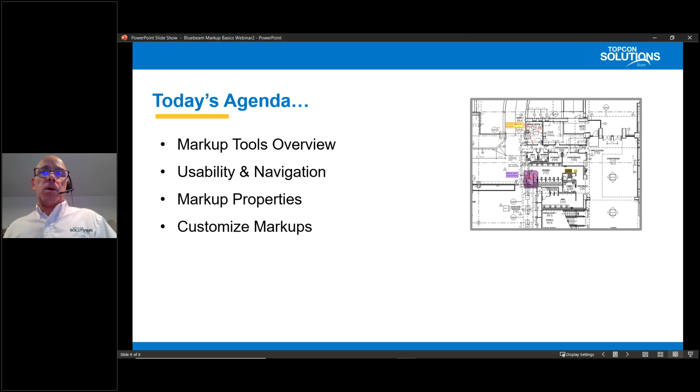So let's get to it. Today's agenda, folks: we'll start with an overview of the markup tools. Then we'll go into using the markups. We'll work with markup properties. We'll customize markups and tool sets. And we'll go over the essentials of the markups list.

Okay folks, so now let's get into the markup tools, an overview of the markup tools. Currently we're looking at Bluebeam Revu 20, which is similar to Bluebeam 19, and they decided to change it to just 20, which I think is a great idea. Markups are basically comments and annotations that appear on your PDF document. They are fully customizable, they can be saved, reused, imported, exported. They're essentially part of the PDF, but not part of the underlying content of the PDF. Because of this, they can be moved and edited real easily and more readily than the PDF content itself. Markups can actually become part of the PDF by flattening, and then they can also be associated with different layers.

So let's just take a look at where the markup tools are actually located. Up in my tools menu, top of my screen, this drop-down will show all of my markups. These are all my markup tools. I've got the little tool here, text box with letter T next to it. T is going to be your shortcut key, as well as W, N, and Q. So here we've got text box, typewriter, note, callout. We've got pen and highlight. The eraser tool only works with the pen and highlight right in here.

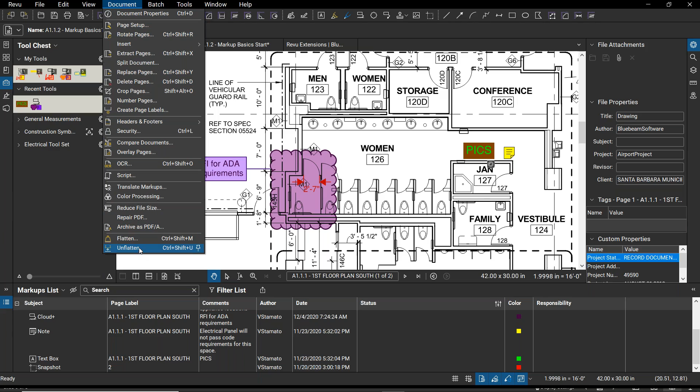So before I do that, I'm going to come up here to Document, then down here to Flatten - Flatten and Unflatten right next to it. If I click on Flatten, I get this drop-down box with options. One of the most important ones is 'allow markup recovery.' If I have that checked on, when I flatten these markups to my document, I can unflatten them if I want to access them, edit them, remove them, or copy them. So as long as I have this checked, I'm good to go, or I could recover the document.

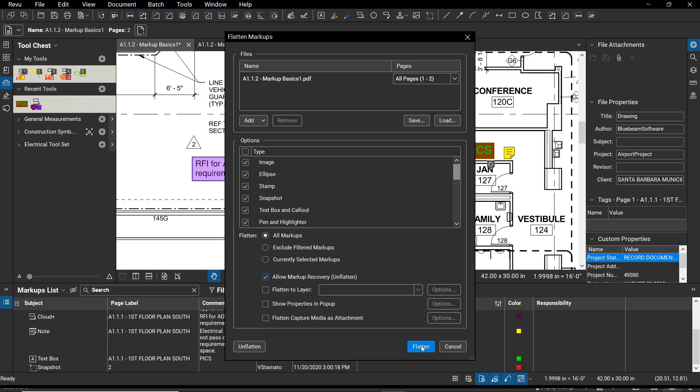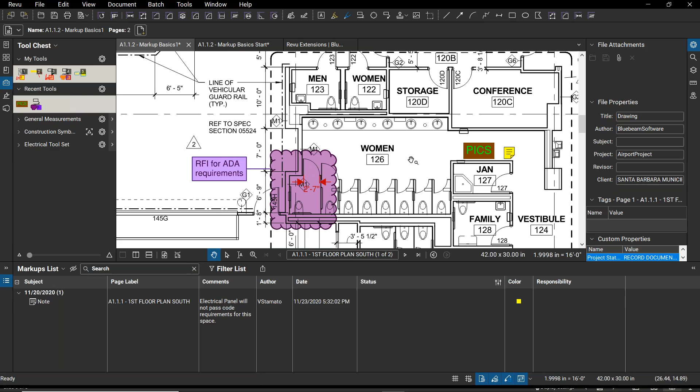So now I'm going to go ahead and just click Flatten, and you can see all of those markups are no longer in the markups list. The one that was unable to be flattened is this note tool, over here - we'll talk about that in a moment. But now you can see I can try and select these, and they're part of the PDF content, but they kept their image and their color.

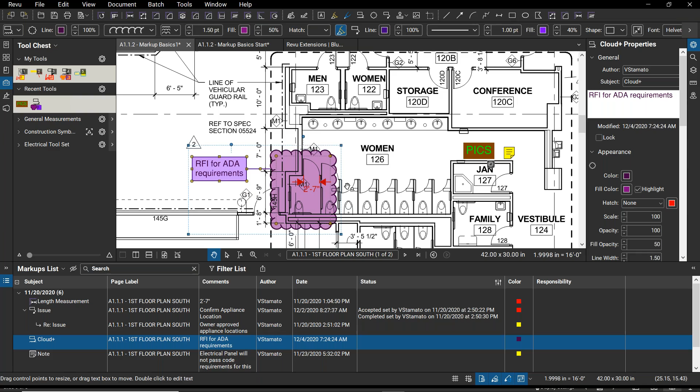So now if I want to unflatten, I would go back to my document, click down here on Unflatten, and you can see the markups list is now populated with the markups. I could go back to my markups, click on them, edit them, move them around, and have access to them.

So that's kind of a way to almost protect your markups as well. If you flatten your markups to your document, another user can't accidentally select them and change them or delete them, that kind of thing. Another thing I want to show you is you could lock your markup.

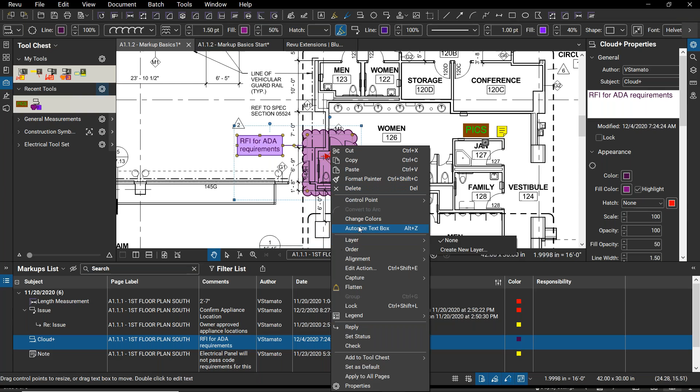So if I select this markup with a left click and then right click, I'm going to come down here to lock. Now the little controls have turned gray, and this markup is locked. I can click on it and it'll highlight, it's still in the markups list, but it's not accessible. I'll right click on it again and unlock.

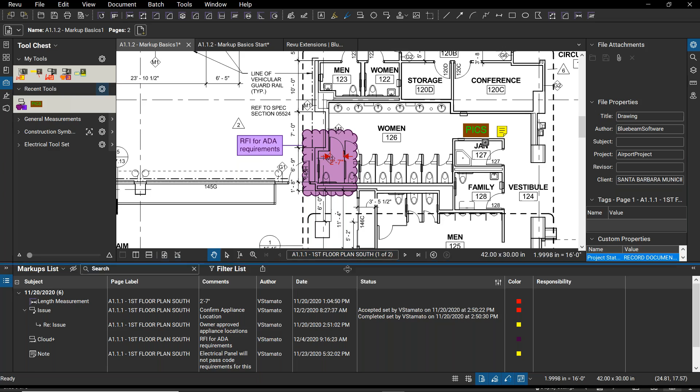All right, so just a couple of things about the markup tools there. Now let's look at where markup tools are actually located. There's a few places where you can find markup tools. One place is on an existing drawing. I've got markup tools on this particular drawing here.

There's also the shortcut key. So if I type in the letter K, that's the Cloud Plus markup. I can go ahead and start my cloud. Okay, so that's one way to do it.

I can copy markups from one document to another. You can come up into Tools, Markup, and select markups through here. And I could also come to my tool chest, which is this little toolbox looking icon over on the left side of my screen.

If you don't see it on your screen, on the left side over here, if I hover my cursor and right click and go to show, this is going to show me all of the potential panels that are available. This is called the panel access area. These are all the panels that are available. So if I didn't have it turned on, I'd come down to tool chest and select it right here and turn it on.

If I wanted to remove tool chest, I can right click on it and hit hide, and then it goes back into the panel access, and it just cleans up this area instead of having a whole bunch of icons there. So the tool chest is another place to get markups.

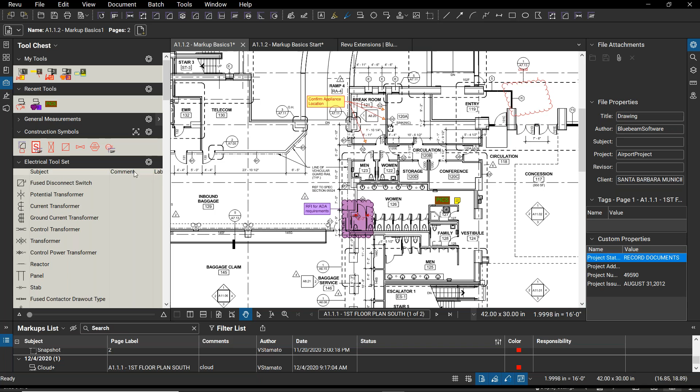So here are more markups. I went ahead and downloaded this electrical tool set from Bluebeam Revu Extensions. And the nice thing about it is I didn't have to make any of these tools, I just downloaded them. I'll show you where you can get tools from Bluebeam Revu Extensions. In this particular tool set, you can see I've got a symbol for the tool, or the symbol for the markup, and then a little subject information about the markup itself.

Inside the tool chest itself, I've got these little cogwheels. If I click on one of these cogwheels, I can change how my tool set is displayed, either by detail mode or symbol mode. If I go to symbol mode, I can hover over the tool and still get a little tooltip. Basically it's just a single click on that tool to bring it into the drawing and place it on the drawing. So that's symbol mode and detail mode right in here.

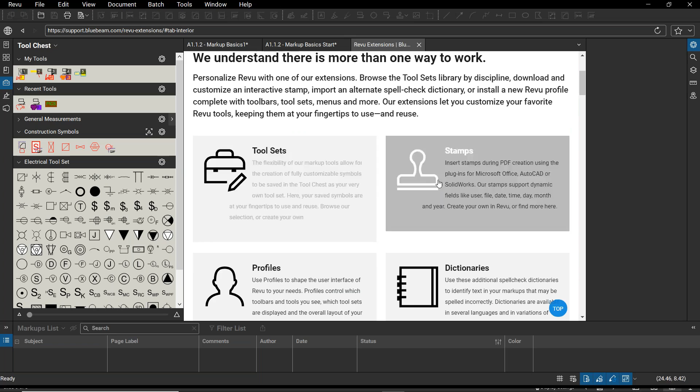Another thing I want to take a look at, folks, is — well, I mentioned the Revu extensions. So Bluebeam Revu has this web tab. It's under the Window menu, Web Tab. I went ahead and opened up this web tab, and then it takes you right into Bluebeam's help. And then I just did a search for Revu extensions. This is a location in Bluebeam where you can download tool sets such as this electrical tool set, stamps, dictionaries, different profiles, and basically you'll see them like this.

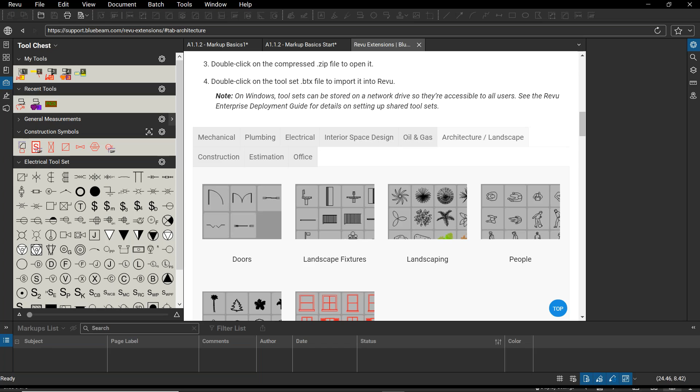It's just a matter of clicking on whatever tool set you like and downloading it, and it basically opens up. What I do with my tool sets is I save them in a separate folder marked tool sets outside of Bluebeam so that I always have access to them.

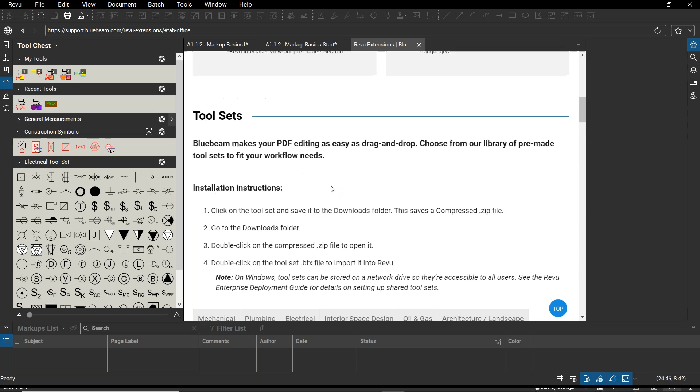Here's some tools for Office. Same with stamps, different kinds of stamps, interactive stamps, profiles, different profiles that you can download, and dictionaries as well. So that's the Revu extensions. I find this really helpful — these tools are already created for us.

All right, so those are locations where you could find markup tools themselves. Let's take a look at markup properties. So markup properties — if you look across the top of my screen, there's nothing here just yet. And if I select a markup, now it's populated.

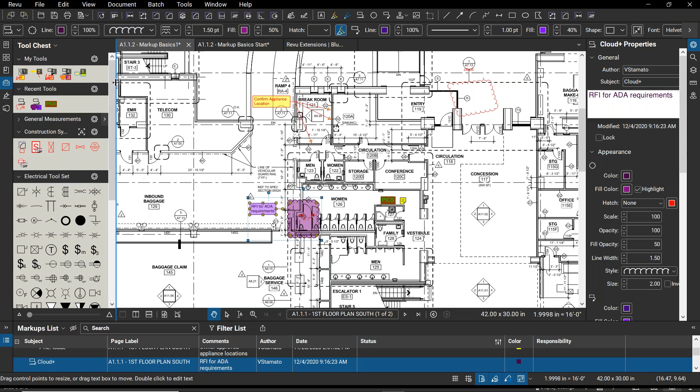So I'm going to hide some of this stuff on the side because it can be distracting. Now I've got these properties — these are the properties of this markup. You can see I've got over here properties of the line, so I've got different colors right here. I could change the colors of my line, change the width factor of the line, change the opacity of the line. Over here, I could change the shape or the size of the actual cloud.

I've got fill colors. I gave this a purplish fill color, and then I could change the opacity of that fill color by going into this next box to make it lighter. And there's also the highlight option right here.

By clicking on that, the markup becomes a highlight, so you can see the color of the markup and still see the content underneath it. And over here, I've got options for my line color, which we're going to use shortly. I just wanted to show you what's available to us.

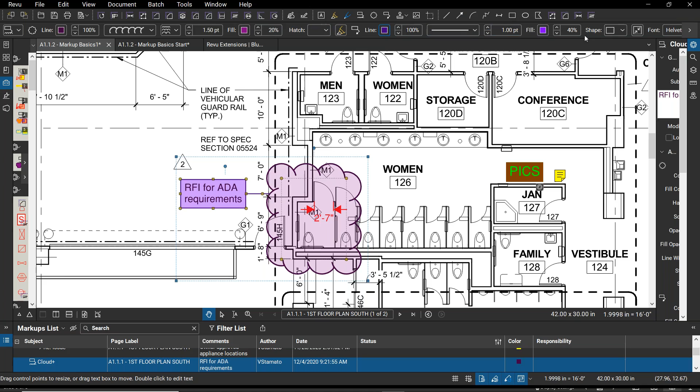Okay, so this is the properties toolbar. It's going to populate as soon as you select a markup, and you can see it disappears when nothing is selected.

And there's another place - as always, software has more than one place for things, keeping us busy. If I select the markup and turn on my properties cogwheel, I'm now looking at the properties of this Cloud Plus tool. There are a lot of options, and some you really want to get a grip on will be the subject of this Cloud Plus.

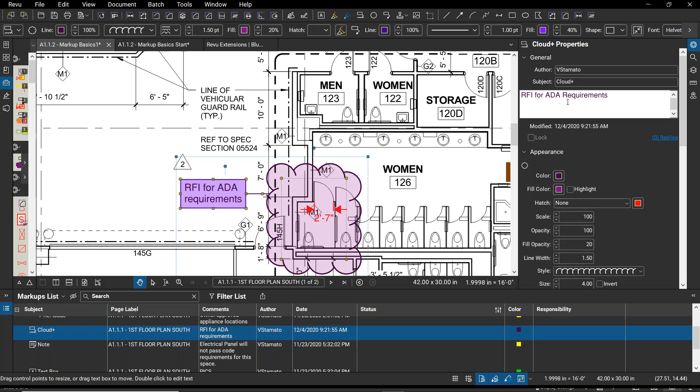Right in here, you can see the text from the text box. I can edit the text right here if I wanted to, or I can double click in the text box and edit the text there.

So there's that. Also down here in the properties cogwheel, I've got options - I could add hatch, opacity, change the opacity, and once again my line style if I have any line style I like.

Colors, and the shape right here - this rectangle - I could change the text box to a circle, triangle, and they've added a hexagon for 2020.

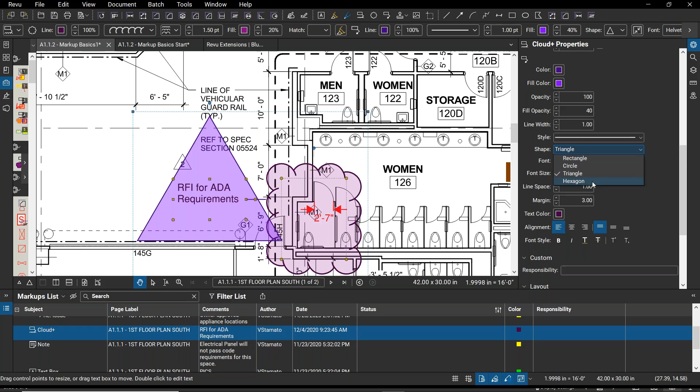Different text types - good idea to use a TrueType font text type that will always print easily. Font size and more font editing tools.

And then down here, I've got custom. Since I created a responsibility column, that custom column is right in here, and I could put whatever responsibility information in there.

And add tool chest - so if I click on this, I could add this to the My Tools tool chest. And those are some of the real basic properties.

Another property I want to show you here is, suppose I want my text box to be rather large, and I want my text to match the size of my text box. So I've got these two other options over here - this auto size text box tool and auto size text.

So if I click on auto size text, it's going to make the text larger to match the size of the text box. And if I click on the other one, auto size text box, it's going to make the text box smaller to match the size of the text.

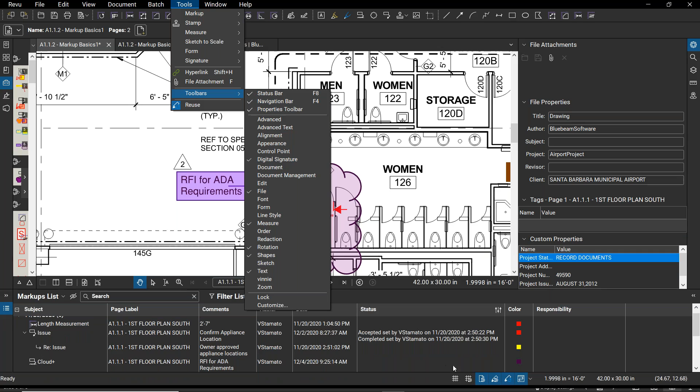And then down here, a couple of things I've got are snap to content, which is good for measuring, snap to markup, also good for measuring, and reuse markup tools. So just by having this reuse markup tools turned on, you could single click, put a markup on the document, hit enter again, and the markup comes right back up. That's your reuse option right there.

This is also available to be set up in your preferences, and your preferences are actually right here - Revu, preferences - and you've got lots of options in here. So if I go to tools, I think reuse is in here. Here it is, reuse tools. So under tools, markup, reuse tools, I've got that selected.

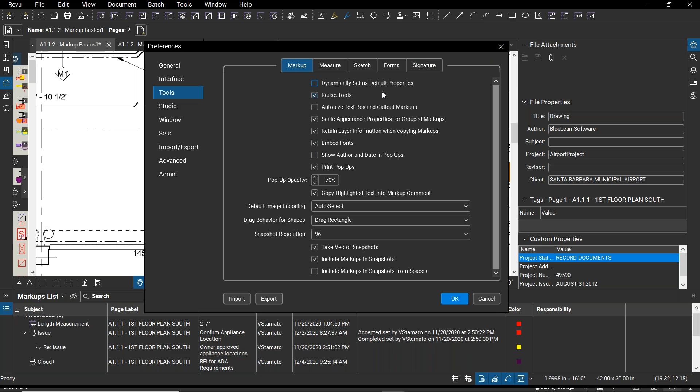We did a little webinar on preferences, and you may find that information on our website—I think it was part of the Bluebeam Jumpstart series, though I'm not sure if it's still available. Anyway, we covered preferences thoroughly. There's a lot, as you can see. All this information is also available on Bluebeam's website, so you can go there to get what you need about how preferences work and how to set them up.

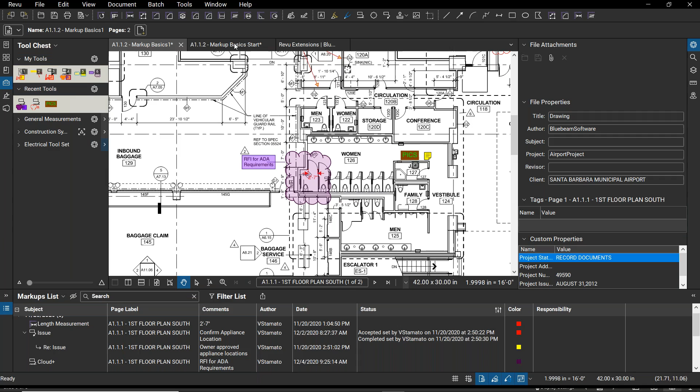Let's go ahead and customize some markups, and then we'll look at the tool chest a bit more. The two tool chests I'd like to focus on are My Tools and Recent Tools. Let's go to our sister drawing—basically the same drawing, but without the comments and markups.

The first thing we're going to do is copy a markup. I'll click on this one, copy it, go into my other drawing, and paste. There's my markup—it comes in with all the information that's in that markup. Simple copy and paste, copied into this new drawing. By doing that, that markup now shows up in My Tools.

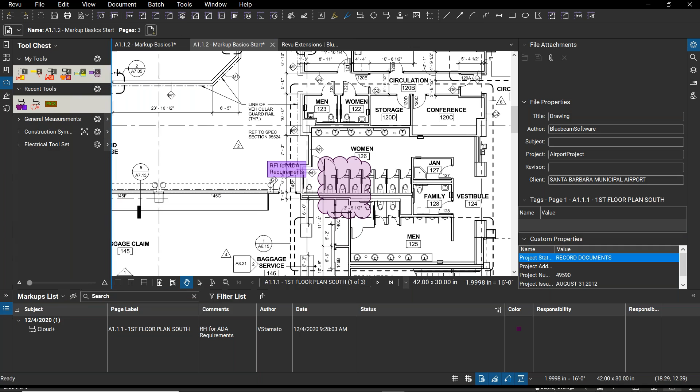Let me make this a little bigger. So here under My Tools, markups, this markup now shows up right over here. I can also access it right from here. By a single left click on the tool, I could bring it into the drawing in the shape that it's in.

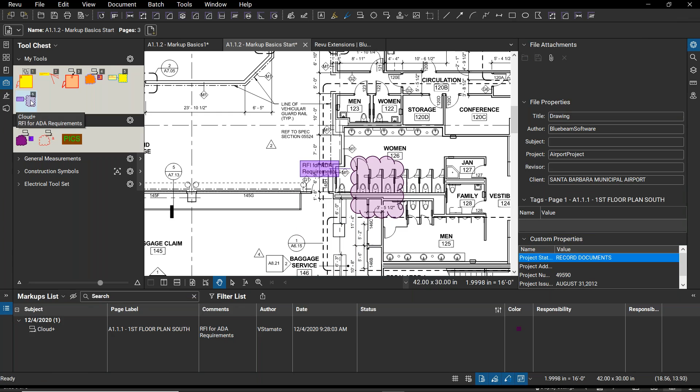So let's talk about that. What I've got here is two ways to access a markup from the tool chest. If I double click on the markup in the tool set, you can see it changes shape and changes its mode of operation. There are two modes: one is properties mode, and one is drawing mode. This is currently properties mode, and I know that because it's an icon showing the tool in a little sketch, whereas drawing mode shows just the tool without that symbol.

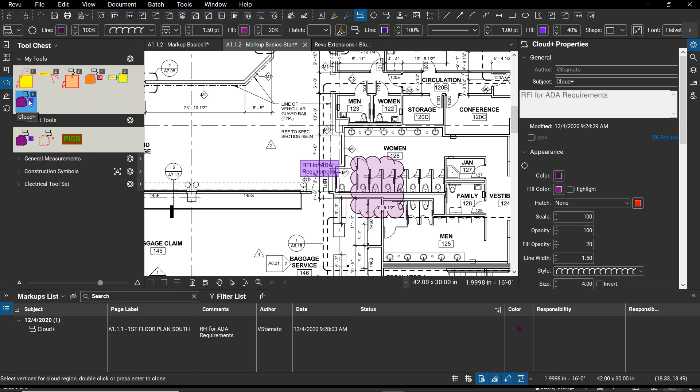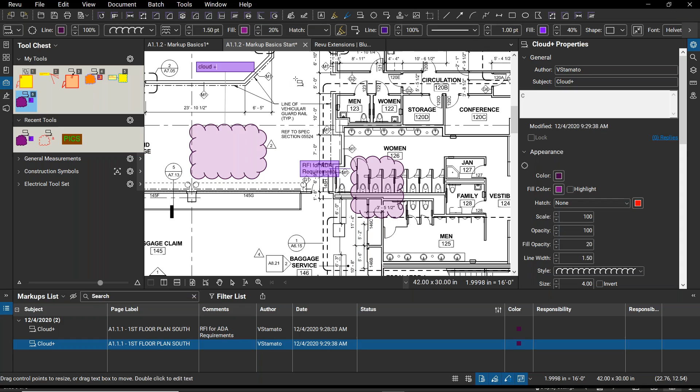Properties mode allows me to create that markup with the properties of the markup, but not the same shape. So I could go ahead here and make my cloud plus. Escape—now I've created this markup with the properties of that particular markup.

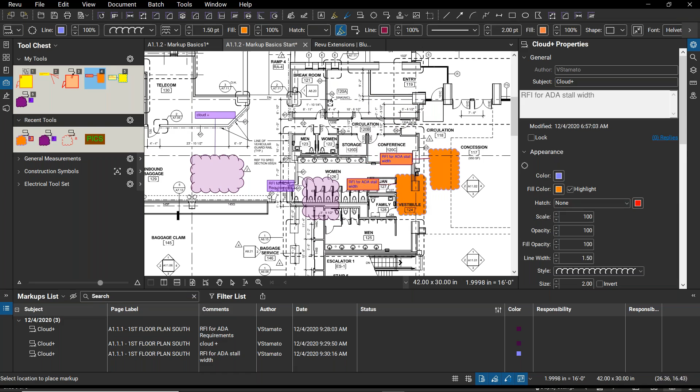Now suppose I've got a markup in here that I just want to reuse. I've already created this markup and I just want to bring it in at that same size. This particular one is an RFI with some information about a stall width, so I'm going to use that just like that and put this right here.

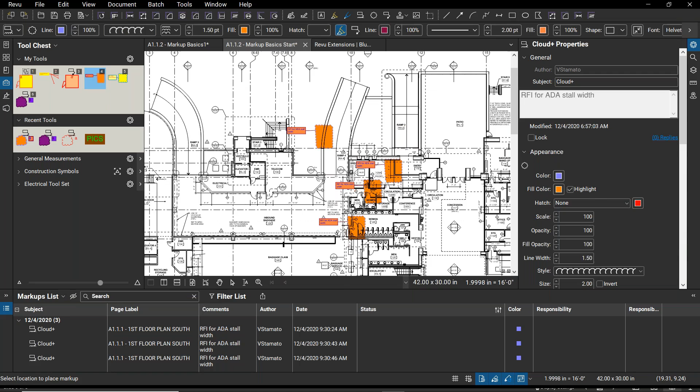I've got a bathroom stall here, and I'm asking for an RFI—I just want to get some clarity on the width. You can see it's sort of at a little corner over here, and I want to make sure all my ADA specs are compliant with this. So what I've done is click on that markup in drawing mode and just dropped it onto the drawing itself, so I can reuse this markup in that shape over and over.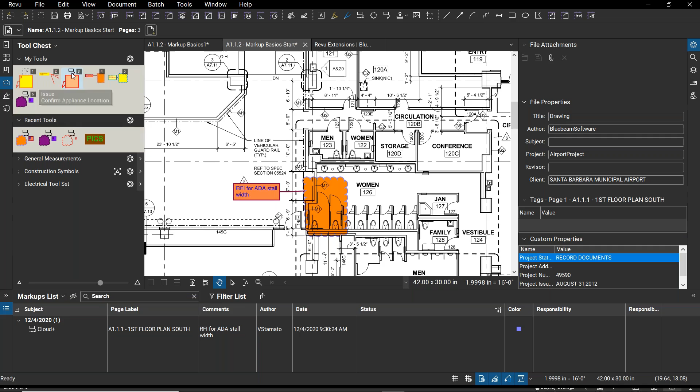Let's take a look at some of the properties here. Oh, another thing—this is really cool. In the tool chest, I've got these tools, and you can see they're all labeled 1, 2, 3, 4, and 5. Now, what do you suppose that actually means? Well, if I come over here and just press key number 5, it's going to give me that markup number 5.

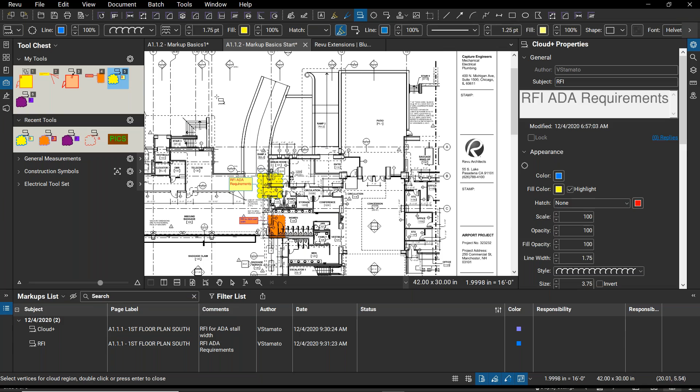And that was in drawing mode. So I click on it, and now it's in properties mode. Type 5—now I can draw that markup in any shape I like with the same properties. So those are just your hotkeys, and they'll only show up in the My Tools tool chest.

Basically, the tool chest is a catalog of available tool sets, and they can be turned on and off. I could use these little chevrons to turn them on and off. The Recent Tools toolbar, or tool set, is going to show you all the recent tools you've used in your session of Bluebeam. When I close Bluebeam down, this recent tool set empties out.

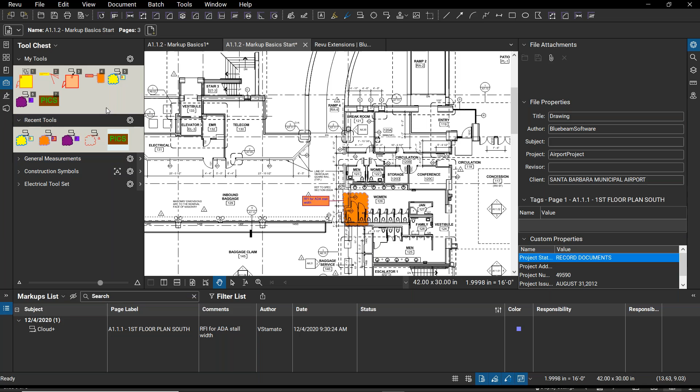So if there are tools in here that you like and want to keep, it's as easy as opening up another tool set. Let's say I got My Tools—single left click, drag it up into the other tool set. There it is, populated with a number that's ready to go. So I'll be able to save that one in the My Tools tool set.

Everybody, I hope everyone's following along. Let's look at some customization here.

So I'm going to click on this one here, and suppose I want to change the color of my fill. I've got orange, let's say I want to make this fill yellow. And I'm going to come over and make the fill of my text box yellow as well, and I'll use the red line work there. Then I want to change this line work here, let's see, where is that? So this line is going to be the line that resembles the cloud, and I'm going to change that to a dark blue.

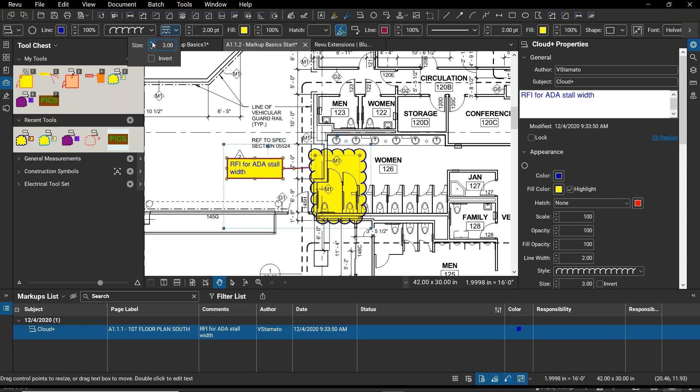I'm going to keep my line style, but make it a little thicker here. And then I'm just going to make my cloud a little larger. So at this point, I'm customizing this tool for what I want.

And then if I want to save this tool in this setup, I can right click on it, add to tool chest, my tools. There it is in my tool chest, ready to go.

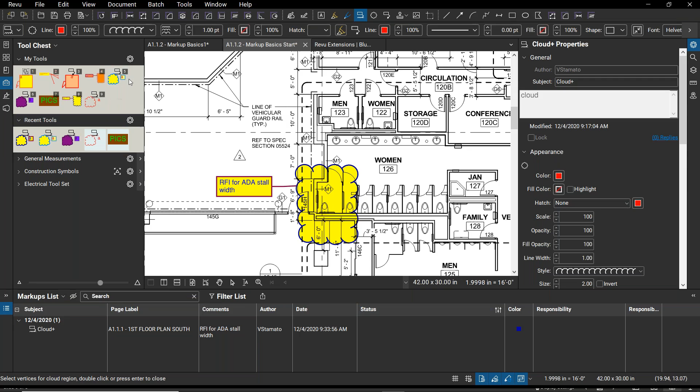So we looked at saving tools, moving tools from one tool set to another. It's just a single click and drag and drop. We looked at symbol view and detail view. Detail view, again, is going to give you, in the tool set, a little bit of details, comments, and information about that tool. Symbol view is where you've got this toolbar, you can double click on it to change its state.

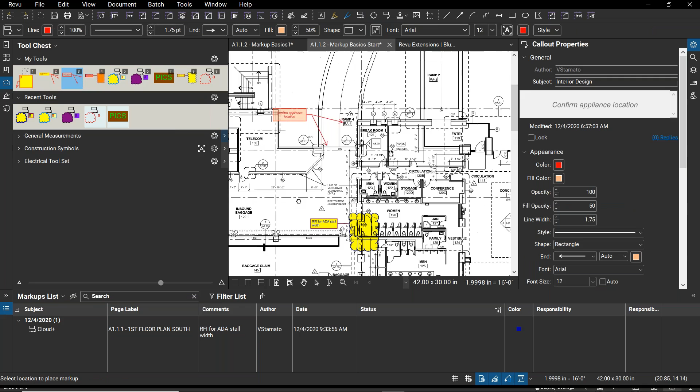Here's another, actually I'm going to make this one. So let's see, I've got this break room here and I don't have any locations for appliances yet. So I just want to ask, okay, what are the locations here? So I'm going to come over and use the callout tool.

And it's going to start by placing an arrow, and then the little callout. Callout tool: single left click, there's my arrow, and then there's going to be my callout. Appliance locations. And I'll escape, that will get me out of placing that callout.

All right, so now let's customize it a little bit. Let's go ahead and give it a fill color. Say for appliances, we're going to go with green. And down here for text, we'll go with blue. And for our line, we'll leave it red. I think that'll work.

And then here, if I want to change the width around that callout. Now I've got this arrow also. If I click on my properties here and come over to the end, I can change that arrow end to a little symbol or a little dot, something like that.

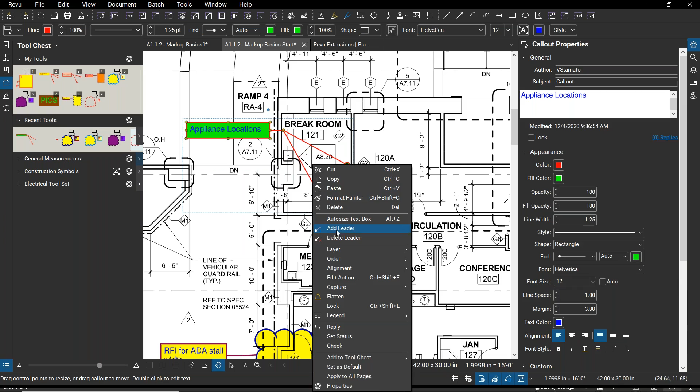And I could also click on that and add leader. So I just left clicked on the leader itself and then right clicked to get this drop down menu and add leader. So, another one: appliance locations. And now, like I said earlier, I could double click in here and change this text to confirm appliance locations, or I could click in this white box over here and do the same thing.

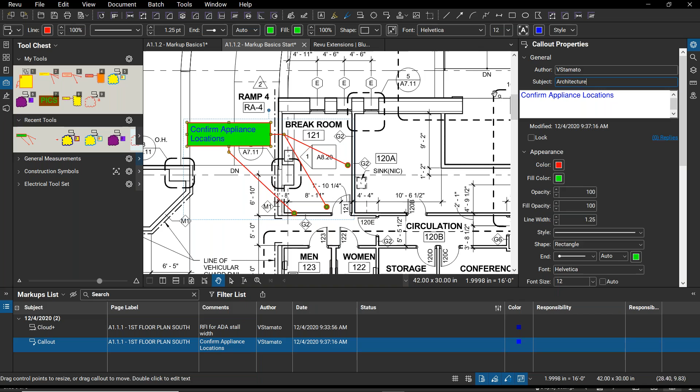All right, so here's this markup. And since it's appliances and that's dealing with design, I want to reference my design team on this. So under subject, and we're going to shift gears a little bit and talk about subjects, under subject I'm going to put architecture. And when I do that, down here, since I highlighted the callout, it's selected, so when I give it a subject, architecture, now I've got an architecture subject.

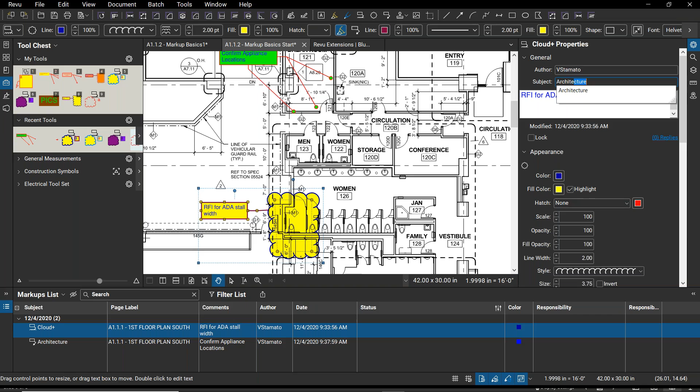And let's say this down here is also going to be something I want the architecture or architects to address as well. Architecture. So now I've got two items, a callout and a question for the architect here. And I'll use this information in another exercise with the responsibility column that we're going to create next.

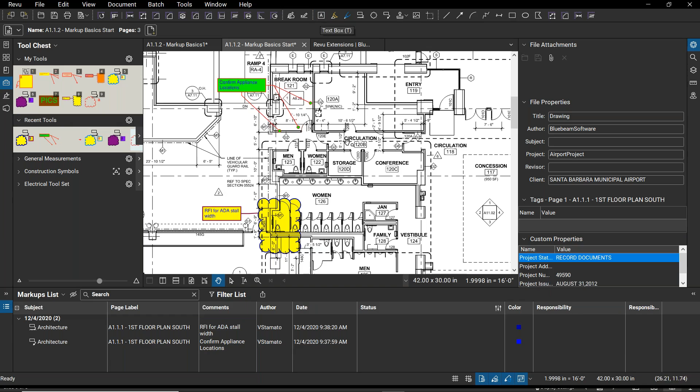Let's look at another tool. So I'm going to do just a regular text box for this. And what I've got here is inside this janitor's closet, I've got an electrical panel that is incomplete, and I just want to bring it to someone's attention. So I'm going to put in a text box and pictures. I'm going to use the text box to alert myself or anyone else looking at this drawing that here is a location for pictures.

Because the little icon for the camera is quite small and it'll easily blend in, I like to put 'pics', and I'd like to make it visible, that looks pretty good. That's my idea here, something like that. And then I could autosize my text to the text box and make the text box just a little smaller.

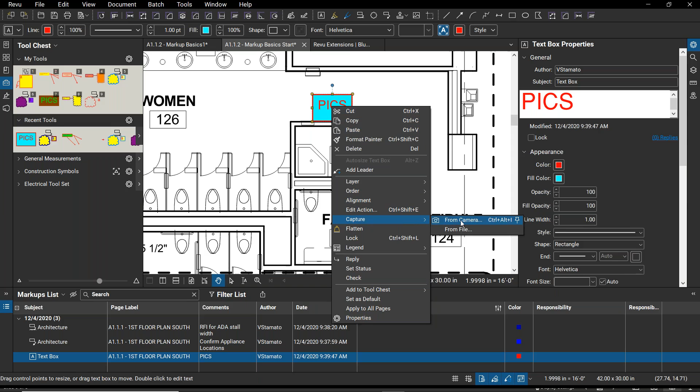So now, since I want to add pics to this location, I'm going to click on that text box that I just created, and come down to the capture tool. I'm going to use from file, and go to the file that has the pictures of the electrical panel that's not complete. Open.

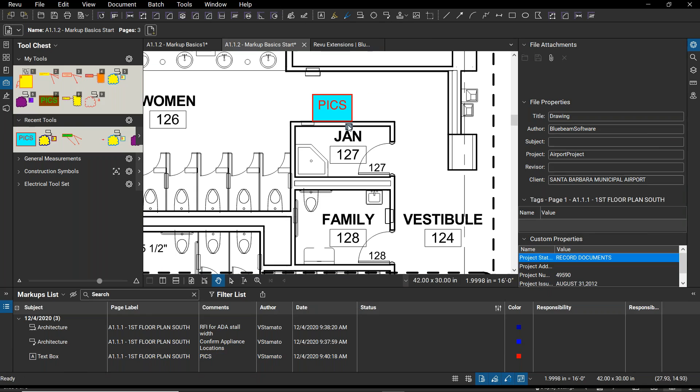Now you can see that icon, it's really tiny. So now I've created this little icon. It keeps getting smaller no matter how I zoom, right? It wants to stay small and hidden. It's kind of staying out of the way.

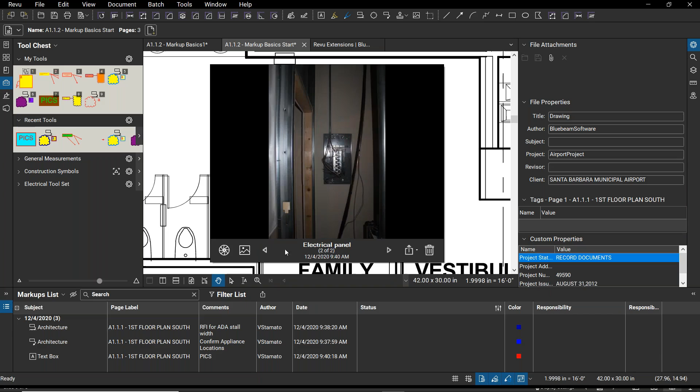I've gone ahead and added some pics. If I click on that icon, I've at times had 10 or so pics in here, low resolution, of course, just for information, whether it's site conditions, existing conditions, or whatever the case may be. Bluebeam also gives you the ability to do a 360-degree view pic.

And I believe you could put short little videos in here too. Don't quote me on the videos, I'm not 100% sure about that. It's been a little while since I've used that function.

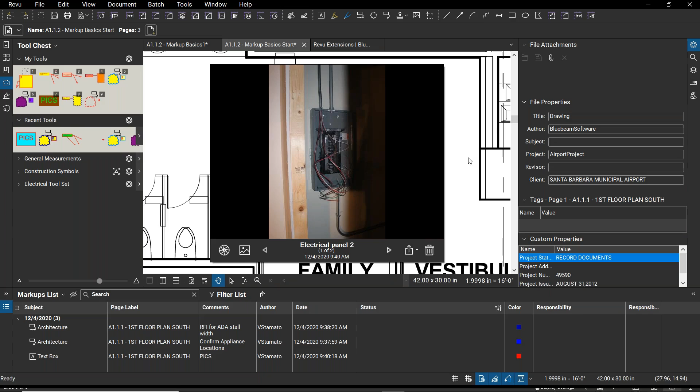So, all right, there's our pics. And now I want to add a note. So there's another tool, the note tool. I come to my tools and markup, note, and I just click right over here. I'm going to put in a note.

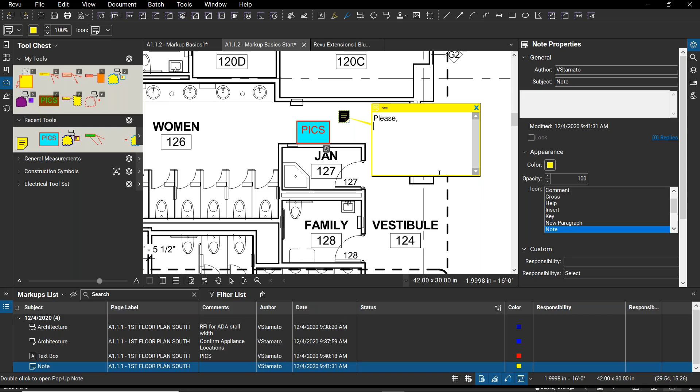I always start out with please. Let's say, please confirm panel locations. And continue.

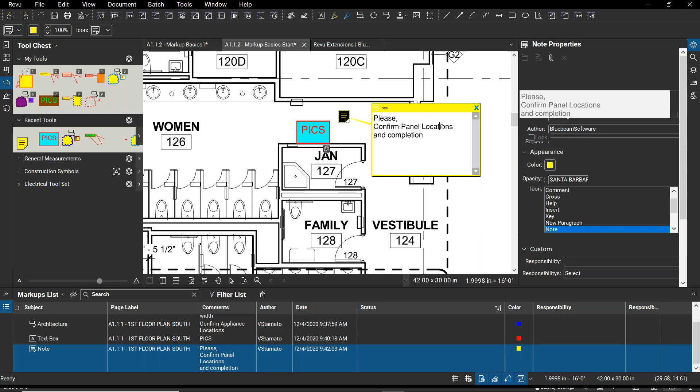All right, so now I've added a note. So instead of putting a text box that's got all that info, I've got a little note. So when I do my drawings, I know if I see pics, now it's pretty easy to find. There's my little icon, I could look at the pics, click on the note. And if I look down here in my markups list, under comments, here's my note markup, and here's my comments.

So this brings us into looking at this part of the markups list. Here's the nice thing about it: it basically automatically tracks all your markups on the PDF. Things like JPEGs, notes, measurements, including author, date, comments. We'll look at some of these other columns that are available.

This markups list can be sorted. If I want, I could just single left click and drag any one of these columns and move it to wherever I'd like. Something like that. And you could set up the orientation of your columns how you like them, and save them in a profile and keep them that way.

Now, just keep in mind when you set up these columns, these columns are going to work with this drawing. So when you open up this drawing, you'll get the display of these columns.

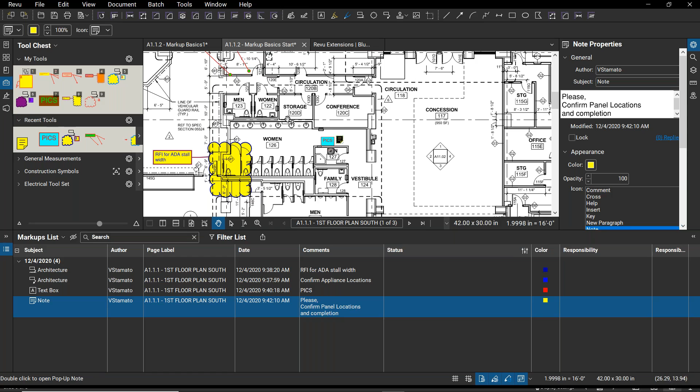All right, so let's go into columns here a little bit, custom columns and status. So we've got our markups, right? And so now what? I need architects to get back to me, and I need electrical to get back to me. So under this markup, actually under pics, you can see subject here just shows text box. That's how it defaults in.

I'm going to change this to electrical. Now I have an electrical subject down here. Okay, architecture, electrical, as many as you want. I could click on these right here and open them or close them down and change the order just by clicking in the subject box.

So next we're going to talk about status. The status column, right over here, if I click on manage status, I get a couple of basic status models. So I've got review. I click that on, and it gives me these models: accepted, rejected, canceled.

But I don't necessarily like that model. So I'm going to change and add a status, and I'm going to call this review, and put a number 1 next to it just for now. And now what I want to do is add different statuses. So I've created this new one under add, and then the next thing I'm going to click is add, to add different statuses.

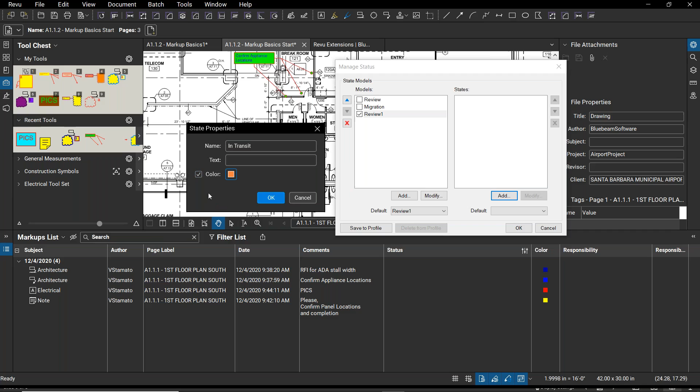I'll create another status called 'under review,' and the color for that I'll give an orange as well, because it's kind of not quite finished. I'll put 'completed,' and go green for completed. In transit, under review, completed, and let's do one more that's 'in progress.'

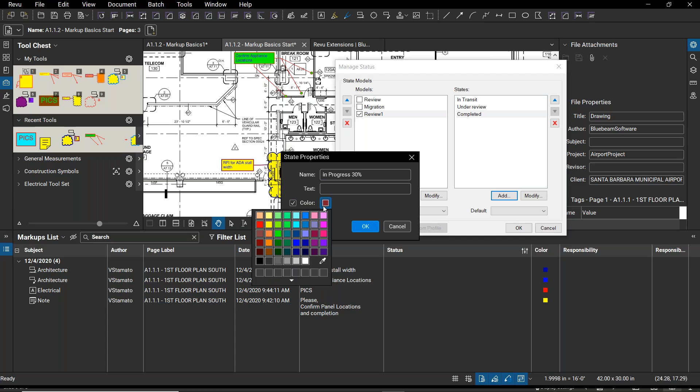Progress, I'll say 30%. And then you could do a 60, a 90% if you like, so I'll just give that a blue. Okay, so now I'm adding these different status states to this new status model that I've created, and I'm going to click OK.

Under status for, let's say, let's click on this architectural, on this electrical one. So I've got rows over here, as you can see. They're not really highlighted that well, but you get used to where they are. So now what I'm going to do is double click in here. And since I created that status field, now I've got the statuses that I've created.

So I could just say for this electrical, it's under review, and then just put that status right in here. And it's going to show up with the color orange, and it's going to change that pics to orange. That didn't, but it should.

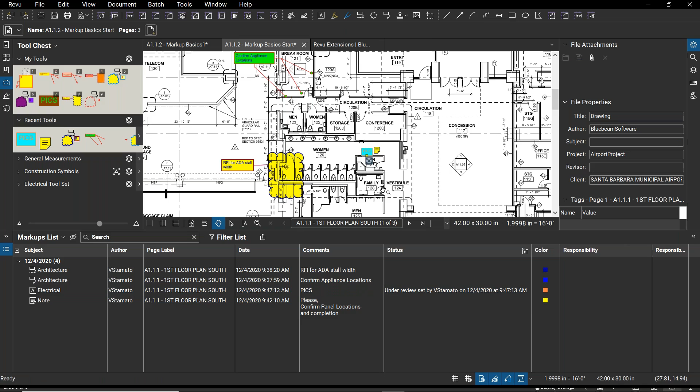And then say we come back a little while later, and now it's going to say we're in progress 30%. So I could stack my statuses, and it's going to change color once again. And if I double click again, I could say, all right, it's now completed. It turns green. So the status column is just a nice way to keep track of what you've got going on.

Next, let's look at the responsibility column. So that's the other one that kind of goes hand in hand with status. Let's take a look here under columns.

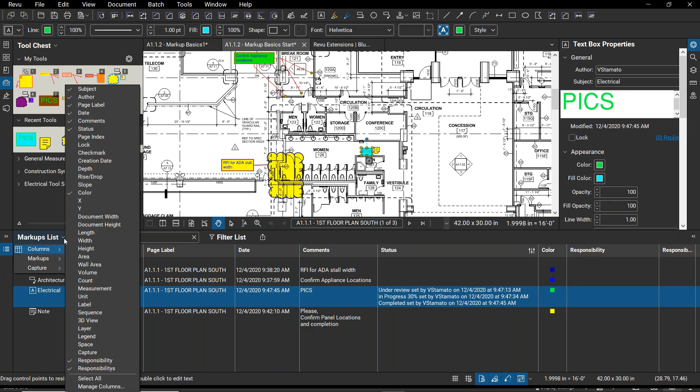So markups list, right next to it is a drop-down arrow. And then if I hover over columns, these are my available columns. And then down here are my custom columns. So I've got a couple in here that I've created, and the ones that are checked on are on, and the ones that are not checked are actually off.

I'm going to click on Manage Columns. Now here are, again, all the columns, and I could uncheck them from here, and they won't display when I click on the markups list, because they'll just kind of be offline for us at that point. I'm going to click on Custom Columns, and I created this column.

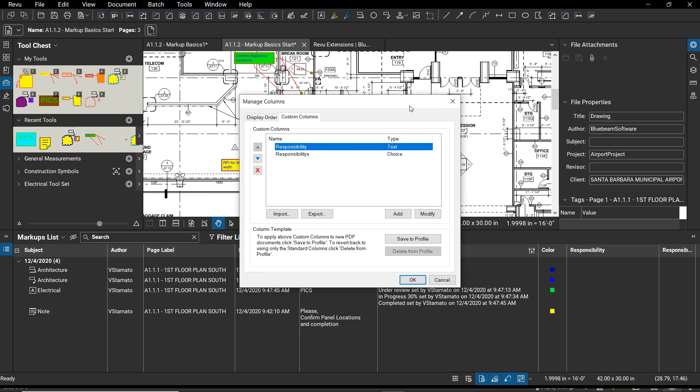So let's take a look at the responsibility column that I created. This one right here is a responsibility column with just text, so I can use this column and just type text into the field. So under responsibility here, I can come over here and just type in text and put in a name, and say this is going to be Becky. She's on the hook for electrical.

Or I could do a choice. So I'm going to come back to my markups list and columns and back to responsibility. Oh, I turned that off. Back to manage columns, custom columns. So now I made a custom column here, and I made it a choice type column.

The way I would do this is add, and I type in responsibility, and I'll just put 1 next to it. And I want this column to be, so here's my choices or my options for this column. I could either have a check, you can make a choice, put a date, formula. When we do our measurements webinar sometime next quarter, we'll look at that. I could just place a number, say this is going to be part of a formula, and I want this number to be cost of material or something, and I can type that.

I'm going to click on choice, excuse me there, and now I've got options. Item is going to be, say, the name of the entity that's going to be responsible, and subject line is going to match with these subject lines here. So it's going to link those right up.

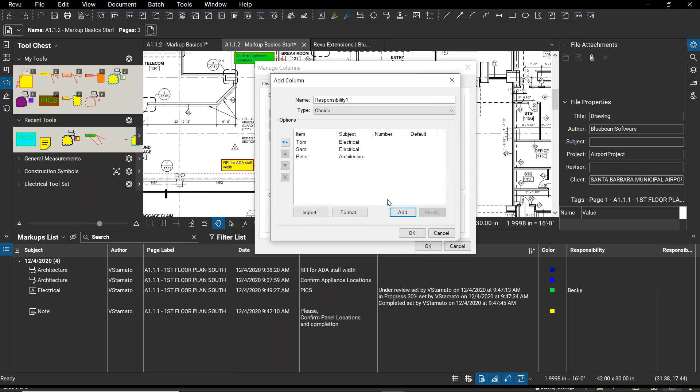So I'm going to go ahead and add item, and I'm going to say this is going to be Tom. Subject is going to be electrical, and okay. And then the next one I'm going to add will be Sara, and subject here is going to be electrical. And then under, let's see, I'll do a couple for architecture so you can see how that works. So for this, I'll put down Peter, and subject is architecture. And we'll add one more, and we'll call this Karen, and put architecture here.

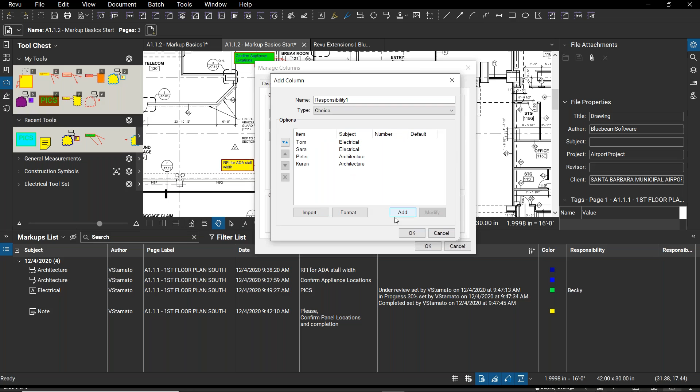So the idea with this process is, now what I've done is put names to the subjects. These are the responsible parties, and I've added subjects. I'll hit OK, and that's my responsibility 1 column. And again, with this, you can save this column that you created to your profile.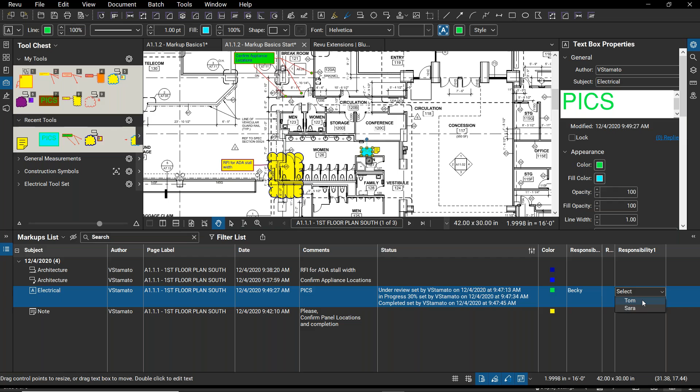I'm going to look at responsibilities. Here's my responsibility 1 column that I created. Let's take a look at our electrical issue down here. If I double click on here, it gives me a choice - I could pick Tom, who's the inspector, or Sara, who's the project manager. Let's say I want to pick Tom in this case. Now under architecture, double click over here - I've got Peter, who's our designer. I could select him to address this. And for this particular one, I could select Karen, who's the PM, and she could address that. So that's how a custom column is going to work with your markups.

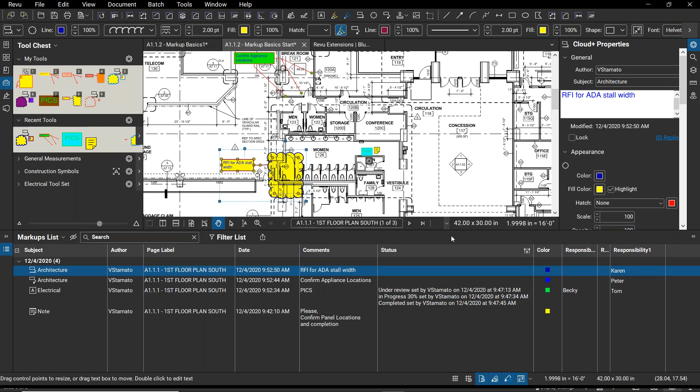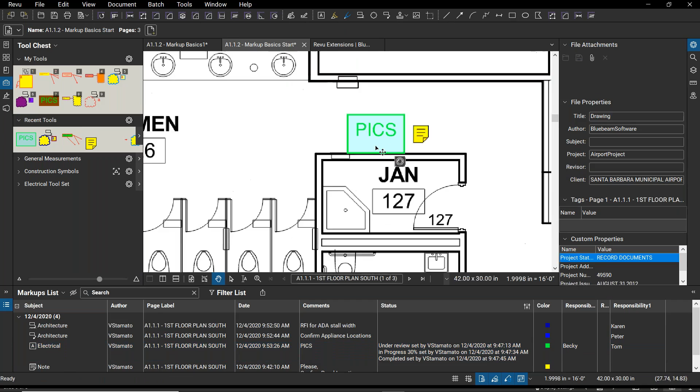Here's how our statuses were working. I know we've covered a lot and kind of quickly, but as a recap, I want to click on this guy and make it a highlight. Will it? No, it won't. But what I can do under my fill color and opacity, I'm going to drop it down a little. Let's go here - there we go. Just so you know, with this one, the text changed to green when this became green.

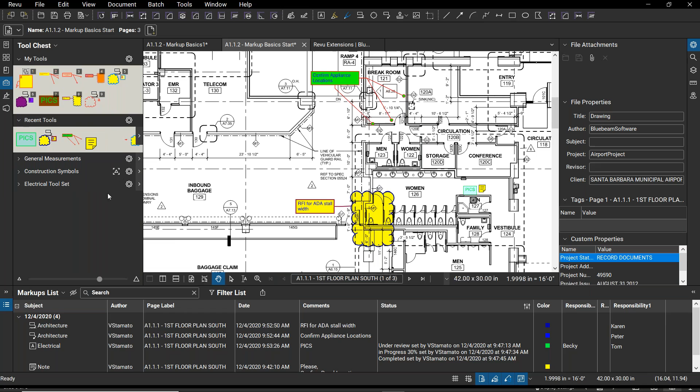That's just a brief look at markups - customizing the markup, giving them different colors. We created different arrow types. We saved markups into our tool sets. We looked at some different tool sets. We looked at Bluebeam Revu Extensions - a good place to check out, folks. Bluebeam's a phenomenal resource for their product, as well as Topcon, and the trainers at Topcon, myself included.

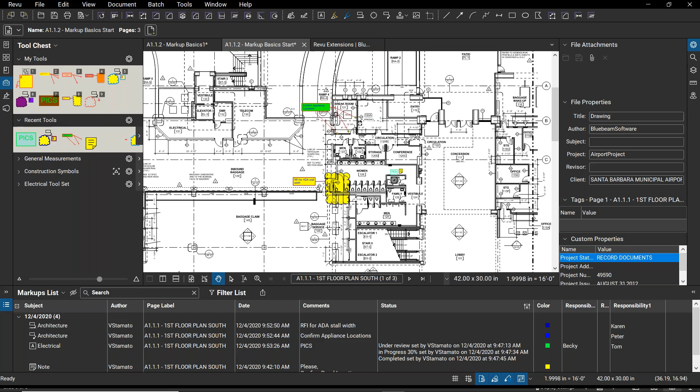Let's see if there's anything else I would like to cover. I'll leave the rest of the time for questions, actually. So let's look at markup summary, and then we'll do questions. We may run over, folks, but we'll try and keep it quick.

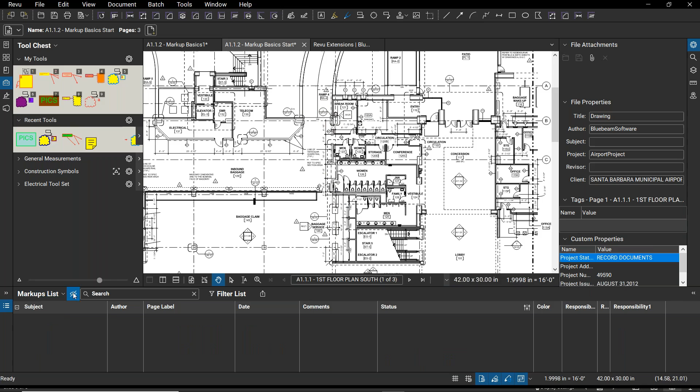So a couple of other markup tools. Next to markups is this little eyeball. If I click on that, it turns the markups off. The idea for that is you can print your document without the markups on it, if that's something you wish to do.

And next over here is our summary. I could have CSV or PDF summary. I'm going to click on PDF summary, and I get this dialog box. What I want to show you here is if I append and hyperlink, the summary itself will be created from the markup information, and then I can click on the issues on the summary and it'll direct me right to the document itself. So append and hyperlink - I've got two styles of summary, flow and table. We'll go with flow, and for thumbnail size, I'll go with small.

Next, I want to go to columns. If I select up here, I can turn them all off. I want subject, I want date, I want comments, I want status, and I want responsibility - I'll use the responsibility one column, since we use that a lot more. So now I have a report that's going to show me all this info.

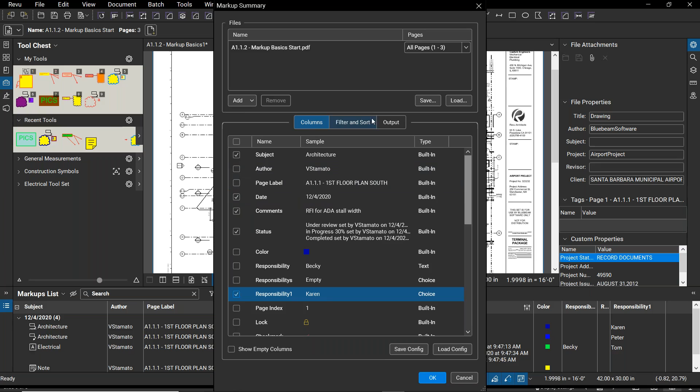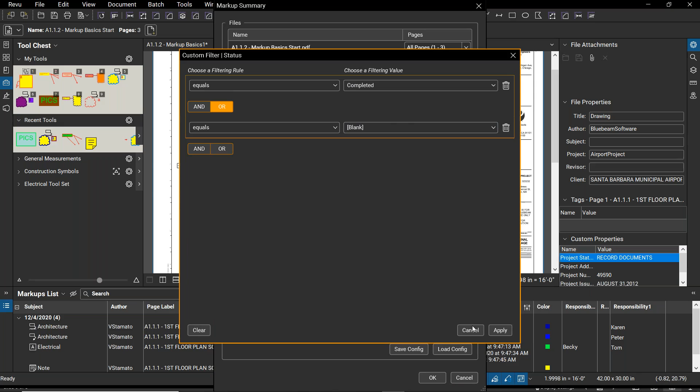Filter and sort - under subject, I just want architecture and electrical. For date and comments, I'll just do all comments. For status - completed, custom - no, I don't want that. Completed and blank. All right, now I'm going to click OK.

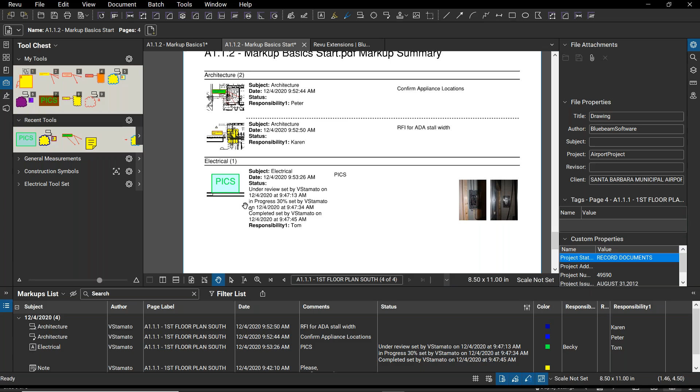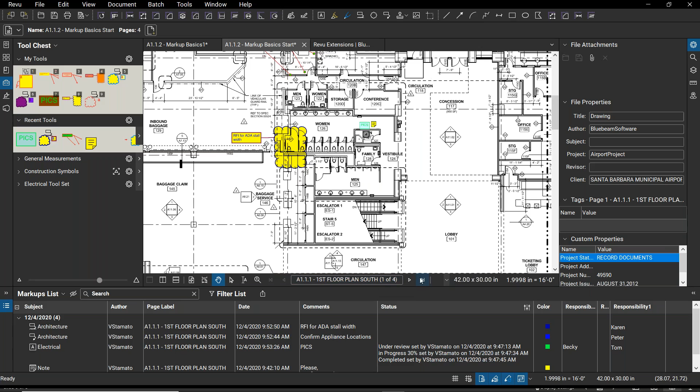And it's going to create a report. It's going to attach this report as another page in that document. Now here I've got a report - it's showing, say for this one, pictures, status under review, or in progress, completed, and responsibility - the responsible party. Same here, this particular one, architecture, an RFI. If I click on that, it'll hyperlink me right to the document, and vice versa. Well, actually, no, it just hyperlinks me right to the document. Go back to it, same thing here. So you can take this report with you into a meeting and just talk about issues on the document. Have the document there with you, but now you've got this report to help focus some of the comments and information in the markups.